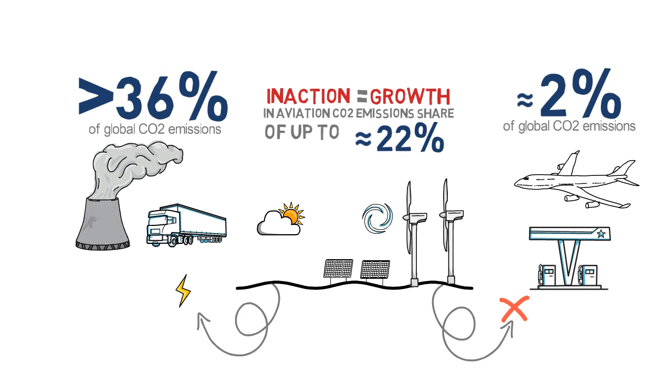So is there nothing we can do? Well, yes. In fact, the aviation industry has a basket of measures. Continuous improvements in aerodynamics of aircraft, engine performance, and flight operations will help the industry to reduce its carbon footprint. But even if there is significant progress, the efficiency gain resulting from these measures will not be sufficient to decarbonize the aviation sector. And this leads me back to why we need SAF.

The development of SAF has been identified as one of the major ways to reduce CO2 emissions. The use of SAF can provide air transport with a near-term solution for a fuel with a lower environmental impact than conventional jet fuel. Now let's look at what SAF means. As you already know, SAF stands for Sustainable Aviation Fuel. Sometimes it's called aviation biofuel or biojet fuel.

It's a cleaner substitute for Jet A1, the conventional jet fuel. And while Jet A1 is fossil-derived, SAF is produced with an alternative feedstock. Basically, feedstock is the material from which fuels are produced. Now, the characteristics of SAF are almost identical to those of Jet A1. SAF therefore meets all the technical and certification requirements as jet fuel and is safe to fly on. Fuels with these properties are so-called drop-in fuels. This means that they can be automatically incorporated into existing fueling systems without any adaptation necessary.

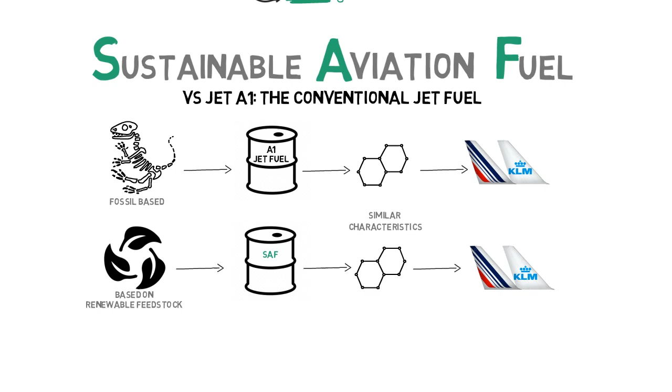Handy, right? So what makes SAF sustainable? SAF must, of course, meet stringent sustainability criteria to qualify as sustainable aviation fuel. These include substantial reduction in CO2 emissions. For its production, it may not require any materials whose use would have a negative impact on biodiversity.

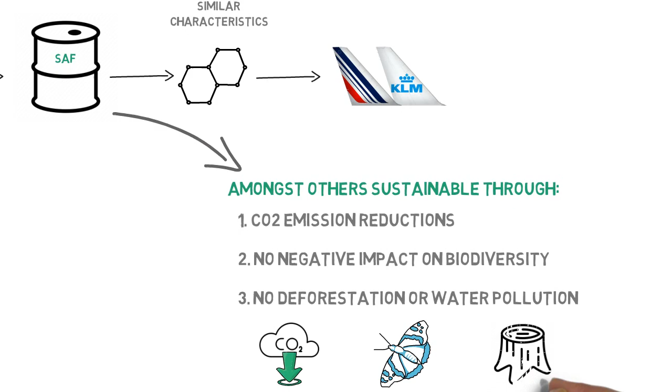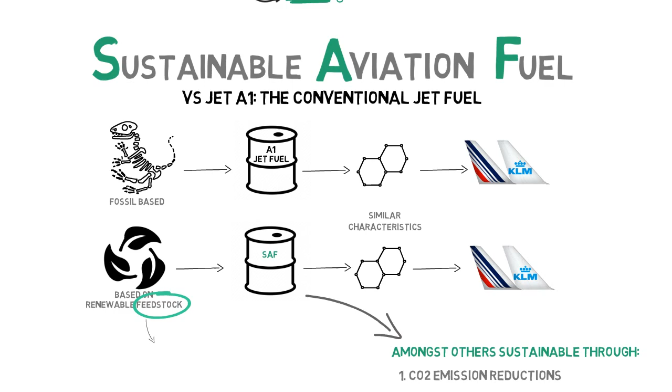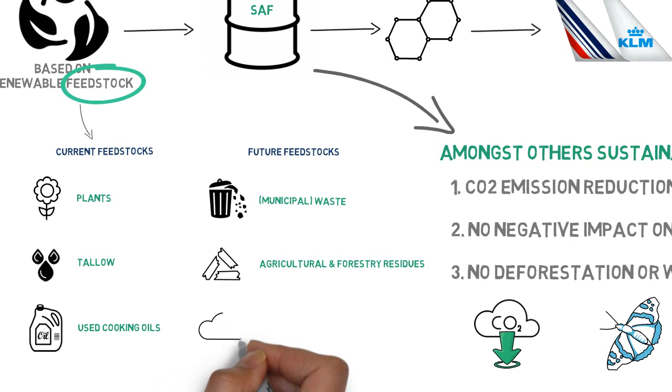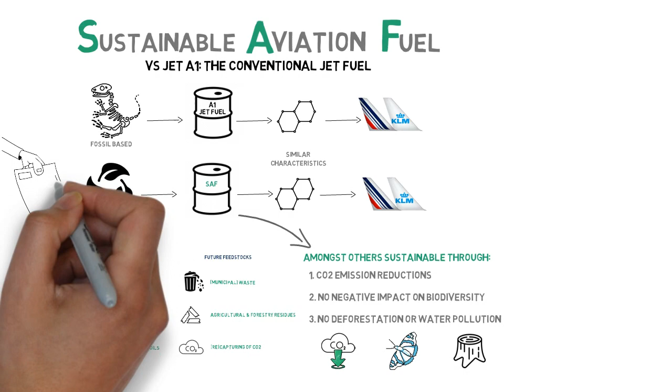To name but a few, municipal waste, agricultural and forestry residue, as well as CO2 itself could in the future serve as SAF feedstock. The sustainability of the chain is ensured through certification by the International Sustainability and Carbon Certification Plus, ISCC+, and the Roundtable on Sustainable Biomaterials, the RSB.

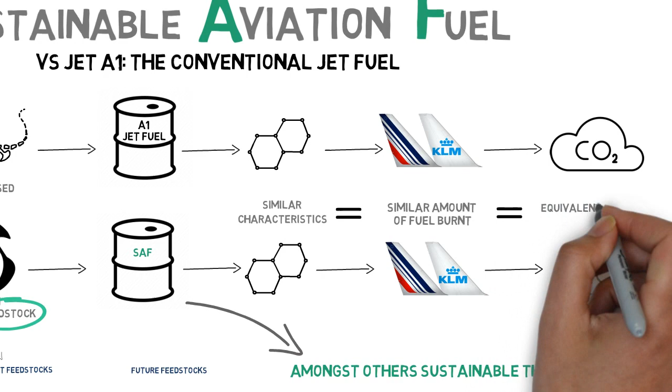So how can SAF reduce its CO2 emissions compared to Jet A1 fuel while their characteristics are so similar? It's a good question. During flight, about the same amount of fuel is burned, and an equivalent amount of CO2 emissions is produced. So it's important to understand that we achieved a reduction throughout the entire life cycle of producing and using sustainable aviation fuel. The source of the jet fuel is the most important difference.

Fossil fuels release additional carbon that was previously stored in reservoirs. Sustainable fuel is made from biomass that has absorbed CO2 emissions from the atmosphere. The amount absorbed is roughly equivalent to the amount of CO2 emitted when the fuel is burned in a combustion engine. Therefore, the CO2 that is emitted when using SAF can be considered to be zero emissions. It's not entirely zero, however.

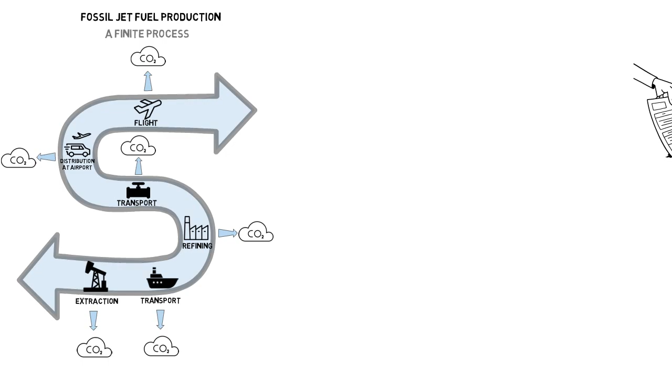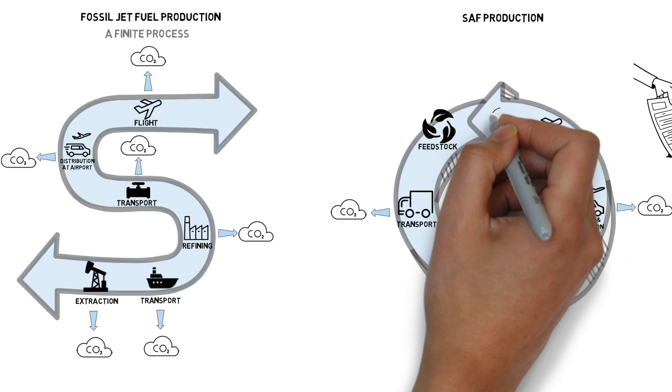Some carbon gets released from the production process, including, amongst others, the transport of the feedstock and the refining of the fuel. These elements of the supply chain are taken into account. As a result, SAF is anticipated to provide up to 85% reduction in overall CO2 life cycle emissions compared to Jet A1. The exact level of CO2 reduction depends on the feedstock and the production method. The SAF currently purchased by Air France-KLM is produced with waste and residue feedstock. It can lower carbon emissions between 70 and 85%.

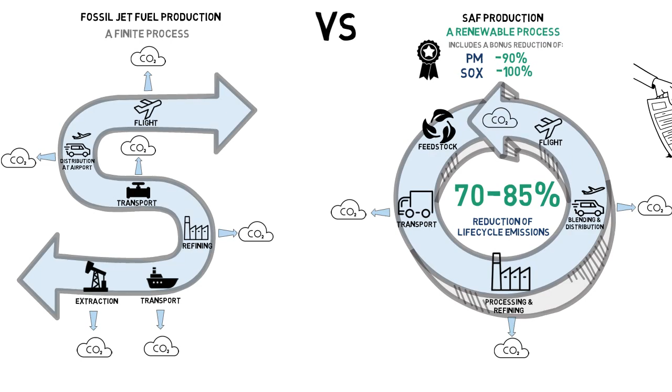In addition to the reduction of total life cycle CO2 emissions, SAF can also reduce direct emissions, particulate matter, PM, with up to 90% and sulfur with 100% compared to conventional jet fuel. Reducing these emissions greatly impacts local air quality, in particular in areas with a high density of flight movements, such as airports. Sounds amazing, right? So why are we still using Jet A1?

That's another good question. And that's because the industry is not there yet. SAF has a relatively short history, and it's not yet produced on a large scale. At this point in time, SAF may not entirely replace fossil jet fuel. It's blended with Jet A1 up to 50%. The worldwide first commercial flight on SAF was operated by KLM, and it dates back to 2011.

So far, there is only one facility in the world that produces SAF on a constant basis, and it's still very expensive. That's why KLM, together with a few partners, is building a fully SAF dedicated plant to produce its own. The facility is located in the north of the Netherlands, and it's scheduled to open in 2023. It will be the first and largest of its kind in the world, producing 10 times more fuel than the current volume available. It will use only residual waste and waste streams from regional industry as feedstock, such as cooking oils.

The role of Air France-KLM is to source a large part of SAF from this facility. This could be the first step of really scaling this industry. However, we will not be able to scale it on our own. Support from companies and other airlines is a must. To facilitate such collaboration, we have now in place a corporate SAF program.